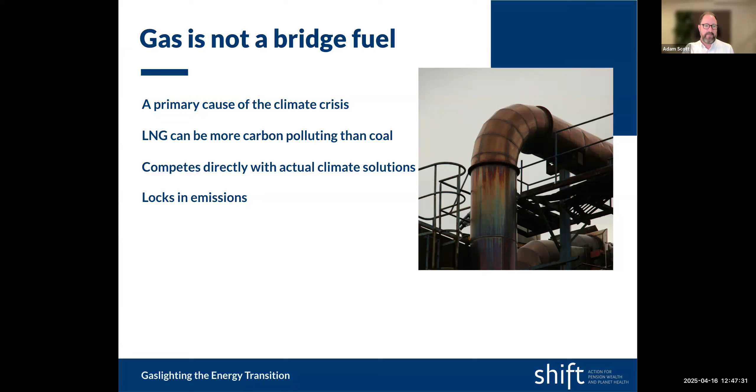But bottom line is we have clean technologies, renewable energies, and heat pumps which can replace gas quite readily now. So we don't need gas as a bridge fuel any longer. I mentioned that the energy transition is well underway, and cheap renewable energy, electricity storage, heat pumps are already taking a big bite out of gas demand globally. So we're already seeing gas facing permanent structural decline any way you slice it.

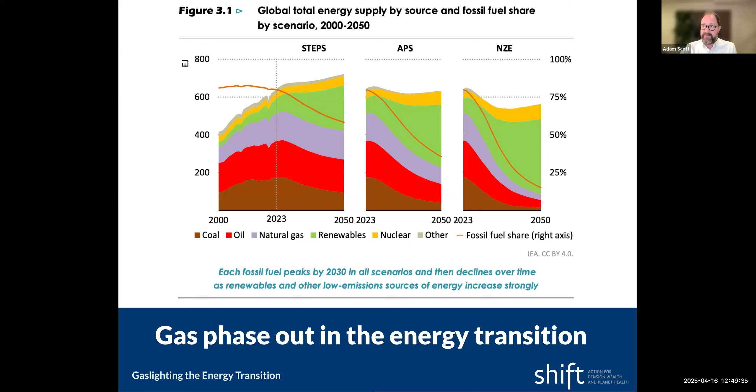And there's just 2 takeaways I wanted you to get from this. Gas is expected to peak and decline in all outlooks before 2030, and it doesn't recover. Renewable energy and electrification outcompete it even without new policies today. And the second thing I want you to take away is that if we have to achieve our climate goals, this NZE on the right shows what gas demand has to do in order to meet net zero by 2050 targets. So anyone who has adopted a net zero objective, including the government of Canada and most pension funds, should be planning for that right side pathway for climate success. In other words, we all need to be planning for the structural collapse of global gas demand, not investing in it.

The utility has to cover the same fixed cost to deliver gas and maintain the system, but now it has to spread that across a smaller number of users. So they have to raise gas consumer delivery prices. And those higher prices drive more people to cut their gas lines and to go electric as well, thus driving even more utility customers to move away from gas until the utility model itself rapidly becomes unsustainable.

And I do want to note, this is a phenomenon we're likely to see with gas utility models all over the world, and it does have very serious implications as well. It creates real equity problems. Not everyone can afford to buy a heat pump, or if you're a renter, you don't have control. So I just want to say there's a whole other side conversation about how to manage this from a policy perspective that's fascinating.

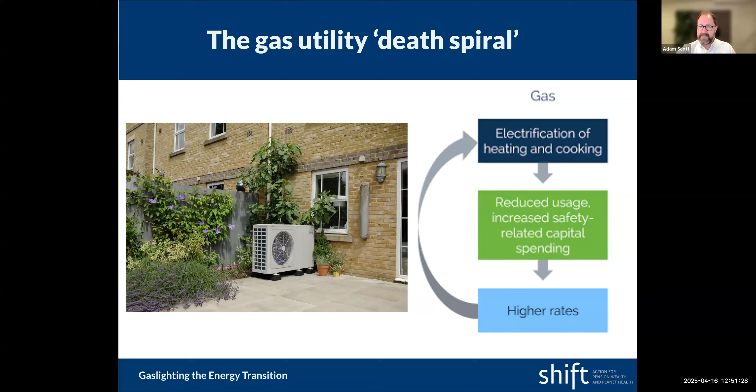And this doesn't include public utilities that are traded on market. So like Enbridge and TC Energy and Fortis, for example, are in addition to this. So we're talking about tens of billions of dollars in direct ownership of these networks. Will pensions be able to sell these assets for anything close to what they paid for them in a few years?

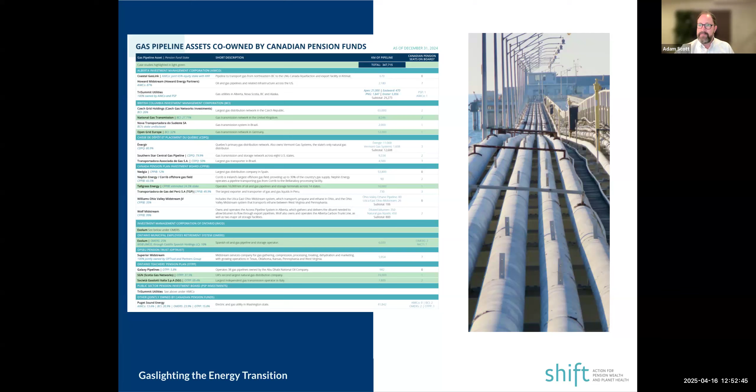Just a quick closer look, which you might be able to actually read. You can see some of the large ownership stakes that we've been tracking. At the top here, National Gas, which is the entire largest part of the UK's gas grid, about a quarter of it is owned by the BC pension manager, BCI. And Tallgrass Energy down here at the bottom is owned by Canada Pension Plan. So almost all of us are 1/4 owners of that gas utility. So this is tens of billions of dollars in stranded assets, potentially.

And so the climate damage and the financial risks of gas are clear, but surely these big financial institutions ask hard questions about this. They must have some due diligence in place. And this is where we see a considerable amount of hydrogen hype, both from the companies, but also from the pension funds themselves. Nearly every one of those companies on that list tells a story about their own plan to use hydrogen to replace gas within their pipeline networks to keep their infrastructure viable and to avoid the death spiral.

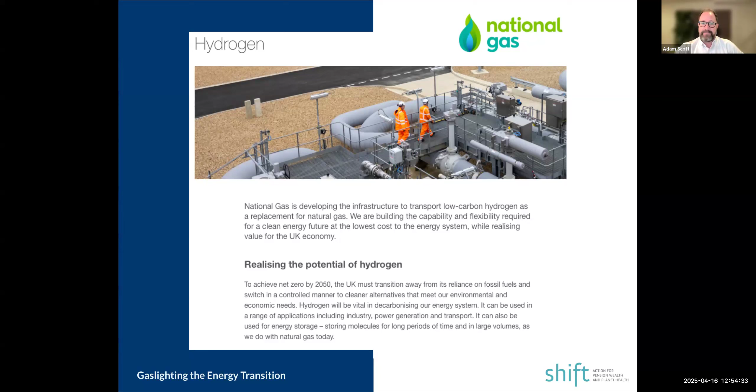And the results on hydrogen heating as an idea are really back now. And I'll give this over to Paul to explain more in the details, but at a high level, hydrogen is just not a good solution for decarbonizing building heat in this way. There's a lot of physical constraints, there are efficiency losses, there are far higher costs for the overall system, higher carbon emissions, potentially safety concerns. There's a lot of reasons why that's not a practical or feasible thing to do. And you would have to really rebuild large parts of the gas infrastructure network if you hope to make it happen in the first place.

And the supply of hydrogen itself is also a huge challenge, which I'm sure Paul can speak about as well, which opens a whole can of worms about issues like carbon capture and storage and other pieces. The electricity grid is already in place and it works well, and solutions like heat pumps are already being deployed directly. And so the need to do that kind of scale of transition doesn't make sense.

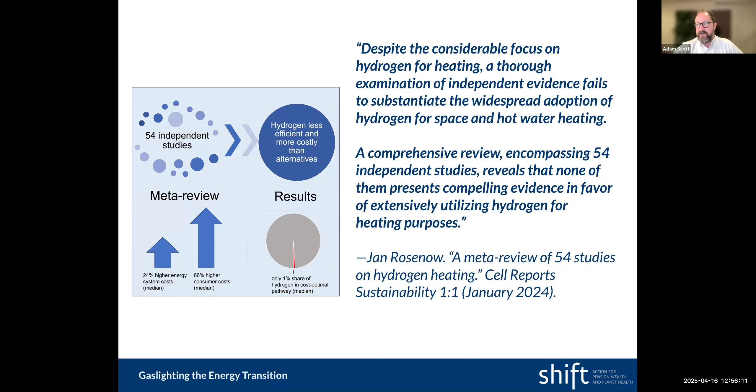And the harsh reality of this whole model is setting in the UK in particular. All of the UK's pilot projects for installing hydrogen boilers for heating homes and making hot water have failed so far. And the UK government, under the previous Conservative government, well before the last UK election, actually commissioned an update to their national infrastructure assessment, asking the question, is hydrogen for home heating feasible? And they came back with a definitive no in 2023. And the UK government has promised to update their whole strategy on this by 2026, where they will very likely cancel or recommend against hydrogen for home heating in the UK.

And you can imagine those sorts of large-scale policy changes could really impact the value of these assets. And this is just a microcosm within the UK, but this sort of conversation is happening in countries around the world where pensions are invested as well, and it's happening in Canada.

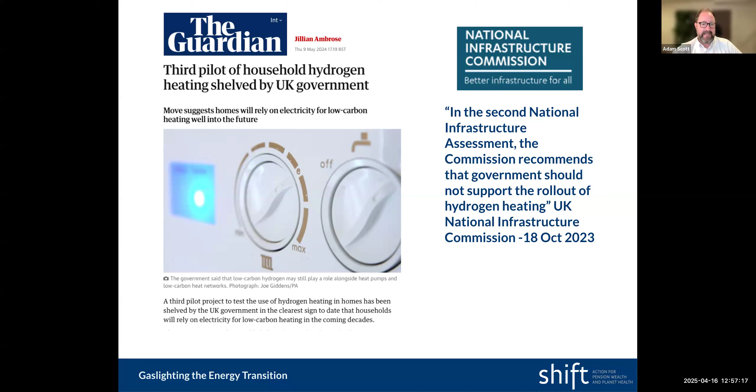There are a lot of complicated pieces to get into for why hydrogen can't save gas utilities from the death spiral. This is a helpful image from the clean energy analyst Michael Liebreich, who was founder of Bloomberg New Energy Finance. And he's developed this graphic over time. This is version 5, and I'm sure it'll keep getting updated to help decision makers understand where hydrogen in the energy transition might make sense and where it's unlikely to be viable.

And I'm sure maybe, Paul, you have thoughts on this as well, but you can see hydrogen has some valuable uses in industrial processes and may play some important but niche roles through decarbonization and the energy transition, but not in areas that could meaningfully reuse existing gas infrastructure at the scale required. And it's really not a viable option for decarbonizing home heating, transportation, or power generation, which really makes up the majority of global gas demand.

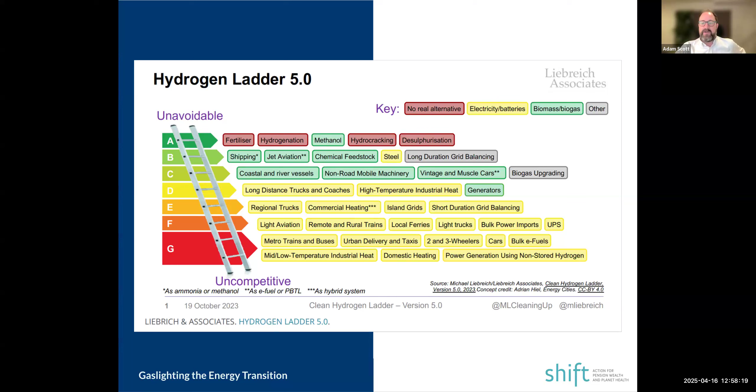Our report sort of ends with some case studies on individual pension investments, which you can look at in more detail. I'll share the link for the report in the chat, but we've also included some recommendations for institutional investors to

avoid the climate impacts of gas infrastructure, but also their own financial exposure to it: to stop investing in new gas and hydrogen infrastructure, to increase their own transparency, disclose your investments fully and explain how they're actually transition aligned, and acknowledge the need to decommission gas utilities over time. This has to be done carefully, and the best way to avoid stranded assets and losses is to start that process now, or at least thinking about it.

And ultimately, to divest and screen from companies that refuse to align with science-based decarbonization pathways, which most of these gas utilities, at least pure play gas utilities, are not at the moment. Yeah, and so I think I'll leave it there, but there's quite a bit more in the report in terms of detail, but I think the important lesson is that

these utility models are already facing very substantial risks, but the investment industry hasn't signaled that it really understands the scale of it. And so this is an effort to shake up the sector to pay attention more closely to the details of the energy transition itself. If you understand the more technical aspects of the transition, you'll be able to avoid these risks in the future, and that's just better due diligence when it comes down to it.

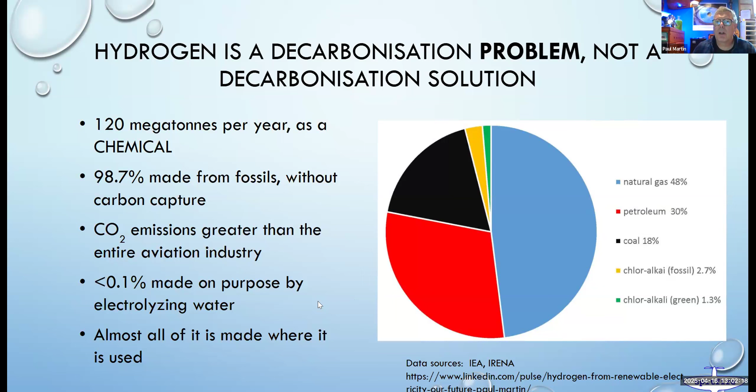Almost none of it is made by the on-purpose electrolysis of water using renewable or nuclear electricity, and almost all of it is made where it's used. Almost no hydrogen moves from place to place. There are exceptions, but the distances tend to be short and the quantity small, and that's for reasons. It's used as a chemical, as I mentioned.

The largest uses are making ammonia, which is the base of the entire nitrogen chemicals industry on Earth, and also the base of the agricultural food chain, feeding about half of the humans and food animals on Earth by crop yield improvements. The other major use is desulfurizing fossils before we burn them. That's obviously going to be a curtailed use in a decarbonized future. And then the final third is a whole bunch of other chemicals uses.

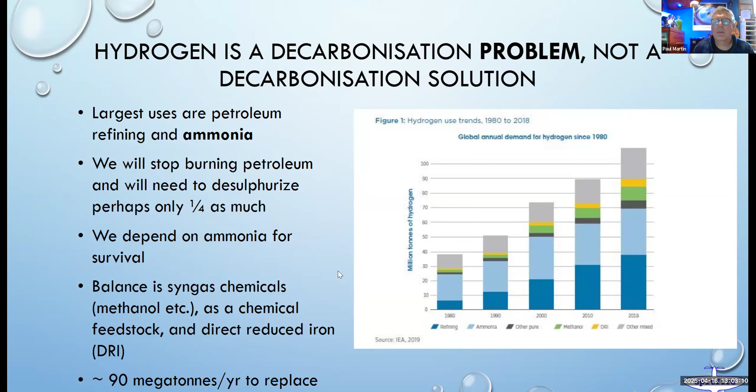So of the 120 million tons or so per year that we make today in the form of pure hydrogen and syngas, about 90 of that will need to be replaced with renewable or low emitting sources of hydrogen in a decarbonized future. And then on top of it, we'll have to make whatever extra hydrogen we want to use for new uses. This is a graphic of the 5 principles of the Hydrogen Science Coalition.

And these are just 5 things that we all agree on. We're a diverse group of people with diverse backgrounds and interests and areas of specialization, but we all agree that really the only hydrogen that you can consider low GHG in realistic terms is green hydrogen, hydrogen made by electrolysis of water using renewable energy. We shouldn't allow hydrogen to delay electrification. So basically that writes off hydrogen as a fuel.

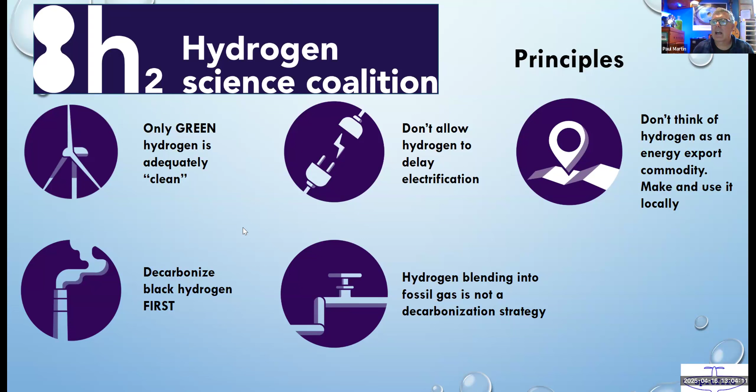Don't think of hydrogen as an energy export commodity because it's structurally unsuited to that task. We need to decarbonize the black hydrogen in the world, this 90 million tons that we need for use as a chemical. We have to do that first before thinking about new uses. And you really just give up on the notion of blending hydrogen into the natural gas network or using it as a natural gas replacement. And that'll be the subject of my focus today.

If you want the peer-reviewed version of it, you can find the paper that I co-authored with several of my colleagues at HSC and also with Ilissa Ocko and others at Environmental Defense. And you can find that in Energy Science and Engineering. And don't worry about the picture. It's just a picture for a nice graphic that Ilissa cooked up for the paper. You can find it in the paper. The paper's free access, so it's not behind a paywall.

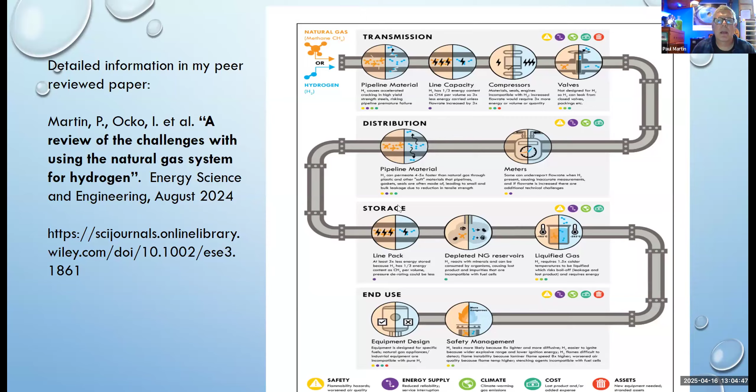So hydrogen as a fossil gas replacement. You'll notice I'm using the word fossil gas as opposed to natural gas because natural gas is intended to distinguish it from synthetic gas, meaning gas made generally by pyrolysis or gasification of other materials. What people call natural gas is largely a fossil material that's pulled out of the earth, and it contains primordial carbon that ends up in the atmosphere as CO2, raising the concentration of CO2 in the atmosphere.

The notion that you can replace this fossil gas and the energy that we use from it with hydrogen is a popular but simple-minded concept. It's kind of a zombie meme idea. Its appeal is simple-minded, and it's so appealing that you'll never kill it. But it can't ever be alive for economic and technical reasons. This notion of gas substitution is largely based on a sunk cost fallacy, which is we have the pipes and they're not going to be useful later, so let's use them for something productive.

And in another sense, it's kind of the let them eat cake of the energy transition. So we can't burn fossils as fuels anymore. Well, what else can we burn? Well, we can burn hydrogen, and that way if we burn it in pure oxygen, we only get water, no CO2. So voila, problem solved. Well, only a few things wrong with that. We burn it in air and make NOx, and we can't afford it. So it really is the let them eat cake of the energy transition.

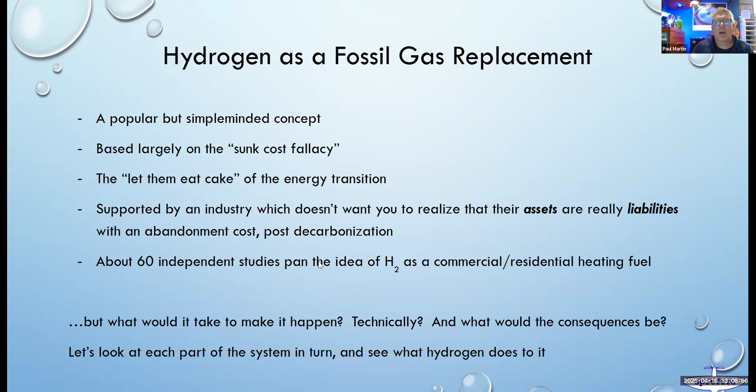The notion is supported by the gas industry, which doesn't want you to realize that their assets are really liabilities with an abandonment cost in a decarbonized context. And as mentioned, there are about 60 independent studies that agree that hydrogen is just not a practical alternative to fossil gas as an energy distribution medium. But what would it take if we were to want to do that for some reason? And I'll deal with that, kind of zipping through here in the interest of time.

But the first problem that you have is that it's pitched as if it's a continuous transition potential, that you can blend a little hydrogen and then a little more later, and eventually you can have pure hydrogen going through the pipes. The problem is that hydrogen's energy density per unit volume is a third that of methane. So it's really like adding water to gasoline. It might be good business if your customers are dumb and they pay for their fuel per unit volume. But it's like adding a diluent to your fuel stream, and that means you have to push more volume in order to push the same amount of energy.

The other problem is that although 20% by volume sounds like a lot, that's the limit at which you start encountering real problems that we'll detail in future slides here. But that's only 7% in terms of energy content. So the maximum decarbonization potential of blending is next to nil. So if gas is a bridge to nowhere, hydrogen blending is the stepping stones to the bridge to nowhere, if you will.

The other real problem is that even at a dreamland future cost of decarbonized hydrogen of $3 a kilogram, relative to about $1.50 a kilogram, which is what the black stuff costs at a zero cost of CO2 emissions to the atmosphere, a zero carbon tax basis. So even at a cost of $3 a kilogram, which is a dreamland future cost of hydrogen, that's still costing you $350 per ton of CO2 emissions averted.

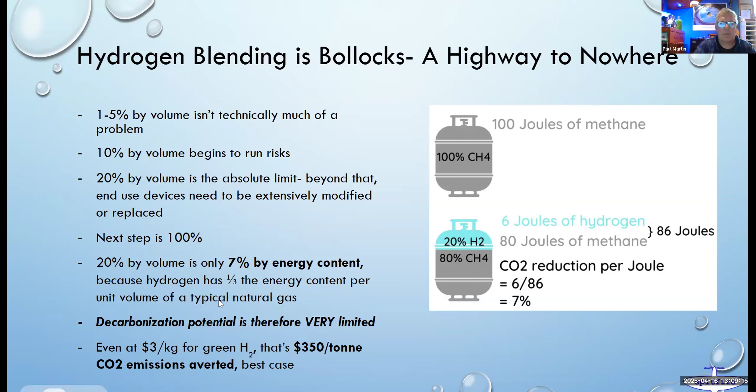So you can imagine that if it's $6 per kilogram, and it might be 9 at the moment or higher, depending on where in the world you're talking about making it, you're talking about north of 700 to maybe even over $1,000 per ton of CO2 emissions averted. And at those sorts of costs, all sorts of things start to make sense. I mean, much less the sane, sensible decarbonization strategies of electrifying transport and electrifying comfort heating by means of heat pumps. Those cost a tiny fraction of this, and yet, that's a dreamland future cost for hydrogen.

The energetics are also really puzzling to anybody that studied thermodynamics. This is a nice graphic that Dr. David Cebon, who's one of my colleagues at HSC, put together, and it shows the comparative amount of wind energy that you would need to supply in order to provide 70 gigawatts of domestic heating in the UK. And if you do it by means of a hydrogen pathway, you're talking about 370 gigawatts of wind energy on the input side versus about 67 if you're feeding heat pumps.

And the benefit of the heat pump, obviously, is that you're using the electricity for what it's good for. You're using it as thermodynamic work to run a pump that pumps heat, and that compensates for a lot of the extra costs and complexity. Whereas with hydrogen, you're doing the exact opposite. You're converting energy in the perfect form, electricity, which is readily convertible to any kind of energy that you want, heat or light or thermodynamic work or whatever you want. You're grinding up its exergy and you're turning it into heat in the form of a stored fuel, hydrogen, and then you're feeding it to combustion apparatus. And what you're left with is precious little energy.

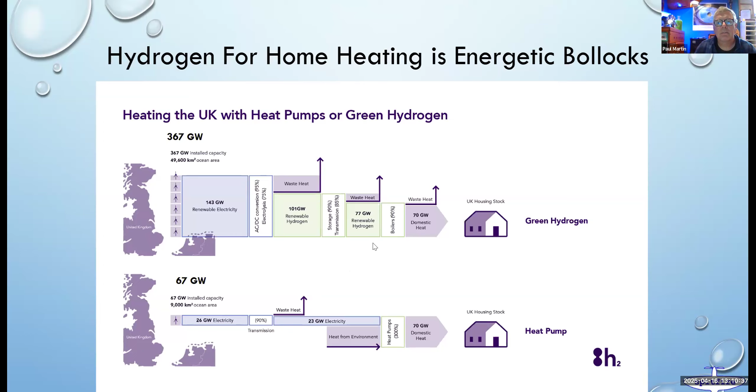Now let's talk about the gas infrastructure. Well, gas infrastructure consists of a whole bunch of pieces. We're going to start closest to the well and go all the way to the consumer. So first of all, the gas gathering and gas plants, the stuff that basically connects the gas wells to the gas transmission network, that equipment is 100% scrap. It has salvage value as scrap, but that's it.

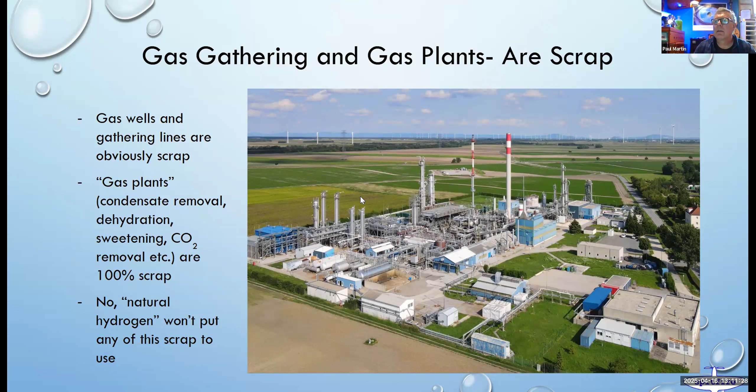And no, these people dreaming of finding large deposits of natural hydrogen in the subsurface, that's a totally different type of gas play. It needs different types of wells. The equipment in the gas plants is not suitable for that. So even if that turns into something, which my colleague Arnout Everts at HSC will argue with you is probably not going to happen, the gas infrastructure upstream is scrap.

The same with LNG facilities. LNG facilities are not convertible to pure hydrogen, and they're not convertible to ammonia either. This is a nonsense idea that has been pitched by people, even including Justin Trudeau at the G7 a few years ago. When I heard it, I spat coffee all over my computer screen. I just couldn't believe that this nonsense was being spoken aloud.

The gases and their liquids have such utterly different physical and chemical properties and temperatures and pressures that there's just no possible way that you're going to use LNG infrastructure to store and distribute and deliver hydrogen across transoceanic distances. And trying to use it for ammonia is just wrong-headed.

If you look at an ammonia plant, it already has liquefaction as part of the plant infrastructure because it's used as a way to get the product out of the gas mixture from which it's made. So there's no need for a separate liquefaction facility like there is with natural gas. So the most you're going to get out of an LNG facility in a decarbonized future is a port facility. You'll even have to demolish the tanks because the tanks are of the wrong construction.

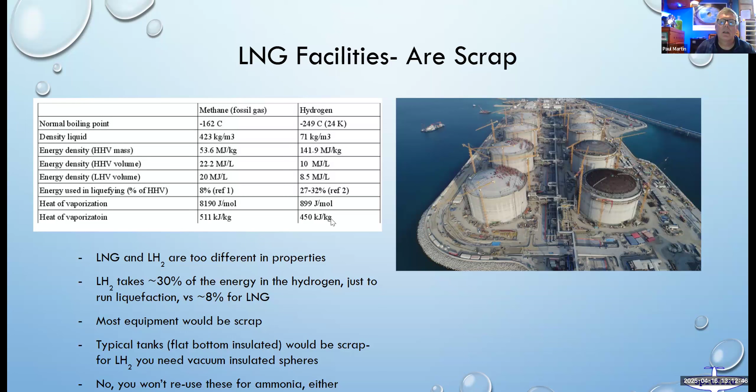The big problem, though, with this gas substitution fantasy is the gas transmission system. This is a really technical topic, but I'll just make it nice and simple for you. You'll hear people talking about hydrogen embrittlement. That's a broad class of different phenomena that happen as a result of interactions between hydrogen and metallic materials. But the real problem in the gas transmission infrastructure isn't hydrogen embrittlement per se. It's a very specific phenomenon called hydrogen-accelerated fatigue cracking, or HAFC.

When you use the hard, high-strength, high-yield strength, brittle pipes that they use to make natural gas high-pressure pipelines, the ones that carry gases long distances across countries, if you add hydrogen to those pipes, what you'll find is that the cracking rate in these materials increases by as much as a factor of 30, and the fracture toughness of the material drops by as much as 50%.

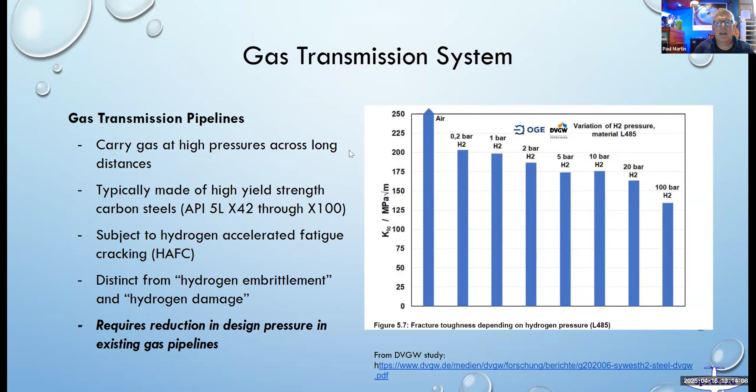And this happens with hydrogen blends, but it definitely happens with pure hydrogen. It's related to hydrogen partial pressure, but it's more complicated than that. There's a really excellent study by an organization called DVGW, which did excellent testing of materials and has demonstrated this to anyone's satisfaction that HAFC is a real thing and a real problem for gas infrastructure reuse with hydrogen.

There are no approved coatings that can prevent this. So it's not a matter of putting a coating or a liner inside a pipe and eliminating this problem. There are people working on those sorts of solutions, but hydrogen is so diffusive, being such a small molecule, that based on my direct experience with hydrogen diffusing right through intact stainless steel in service, I don't think anyone's going to come up with a coating that eliminates this problem.

New pipelines, however, if you want to build a new pipeline and use it for hydrogen, we know how to do that. That's not a problem. So we're really talking about reusing existing natural gas pipelines for gases that they were never designed to distribute.

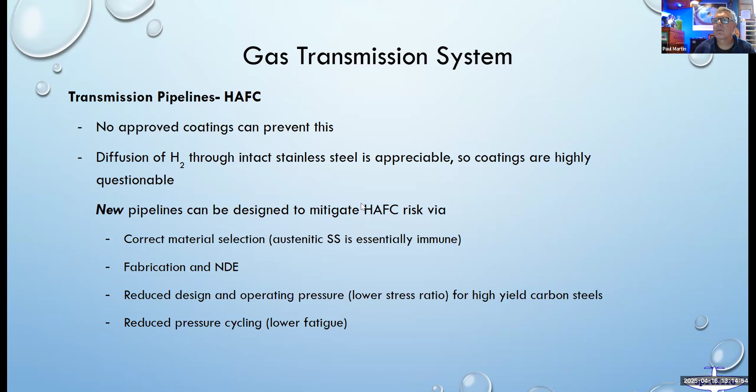The real problem is that even though there are rules that will allow you to compensate for this accelerated cracking and other issues, and to reuse a gas pipeline that was never intended for hydrogen for use with hydrogen, you have to drop the design pressure in order to make it adequately safe, in order to reduce the risk of fracture. And when you reduce design pressure, you reduce the economic delivery rate of energy. And this is an inescapable thing that arises from just dropping the pressure.

But add to it the fact that hydrogen has this lower volumetric energy density, and you end up in real trouble. So you could try to run the compressors harder. You'd have to replace the compressors with new compressors in any case, but you could try to shove more gas through the pipe at a velocity that's not economic, but as it sounds, it will be uneconomic. You won't be able to afford to do it.

And in reality, you're going to have to either accept a dramatically reduced energy delivery capacity in those transmission lines, or you're going to have to twin them with new pipe in order to carry the pure hydrogen in a separate new pipe anyway. And the end result is basically very limited reuse potential for the existing gas asset.

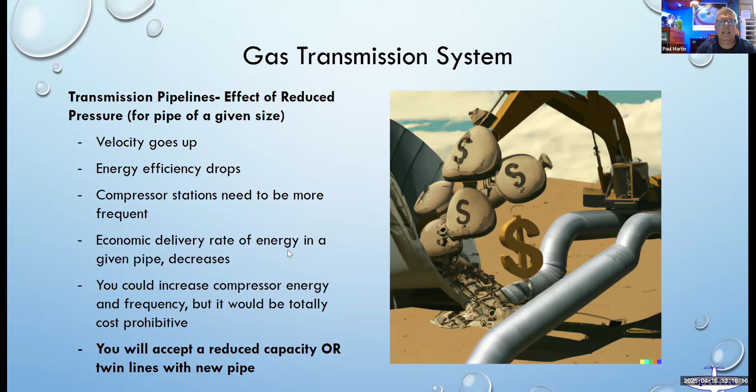Another thing that happens is that we use the stored energy in the pressure of the natural gas. So we pressurize the natural gas above the minimum pressure that we need to use it at. And then we allow that pressure to drop during the day when we have high peaks of demand, and then we pressurize it back up again at night. And this storage is called line pack.

And because the energy density of hydrogen per unit volume is greatly smaller than that of methane, the line pack drops to 1/3 of what it was, even if the pressure doesn't drop. So whereas you might have had 4 hours of storage, now you have a little over an hour of storage. And that storage is incredibly important to the reliability of the gas network.

If a gas network ever encounters a low pressure trip, restarting can take weeks. It's not a matter of flicking a breaker back on again. There are devices that have pilot lights that need to be relit. And if they're not relit, the device will be unsafe and it'll leak hydrogen, for instance, into a home or a business. So this is a big deal.

And the same thing is true. We use natural gas reservoirs as storage for fossil gas right now. We build up the storage in the summer for use in the winter. And you can't do that with hydrogen because it won't be pure hydrogen when it comes back, and there'll be a lot less of it than what you fed. It's possible to build new salt dome gas storage units that are constructed for the purpose of storing hydrogen, but you'd have to construct those. You can't use the old ones.

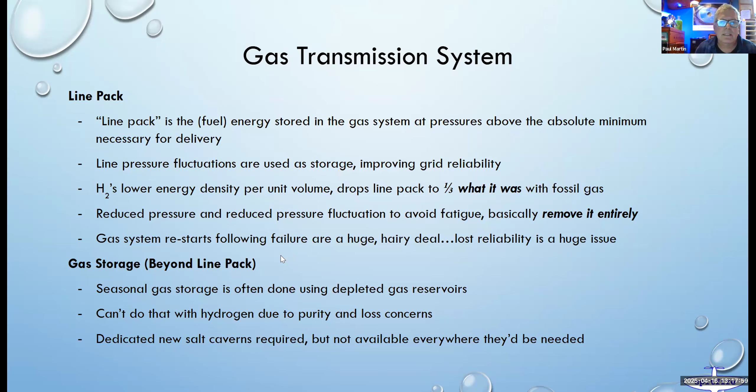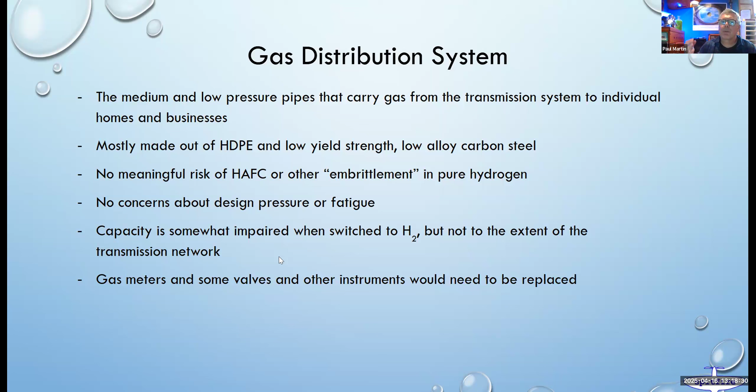The gas distribution system is really not a huge problem. The gas distribution infrastructure that carries gas to individual homes and businesses, that's all mild steel or HDPE pipe. It'll leak, that'll be troublesome, but the real problems of HAFC and other embrittlement phenomena are not a problem there. The real trouble is what use is the gas distribution infrastructure if there's no gas transmission infrastructure to feed it. So the problem with hydrogen isn't in the distribution side, it's in the transmission side.

The other real problem with hydrogen is in leakage and fire risk. And hydrogen has a lot of really unpleasant properties that we know how to handle in industry, in industrial settings, but in a commercial or consumer context, they're very troubling. And if we get time at the end, I'll show this video, but I won't do it now. It's just showing the differences in flame propagation rate among various gases, with hydrogen being extremely fast.

Hydrogen's got a lower ignition energy. It's got a much wider explosive range. So if you have a mixture of hydrogen and air, it's almost certain that you will have a mixture that will be ignitable. The flame velocity means that you get higher overpressures, which lead to more damage. And yeah, anyway, there's a long list I could bore you with, but it's a much more dangerous gas. We know how to handle it industrially safely, but we make a lot of compromises and expend a lot of money to do so. It is much more dangerous than natural gas.

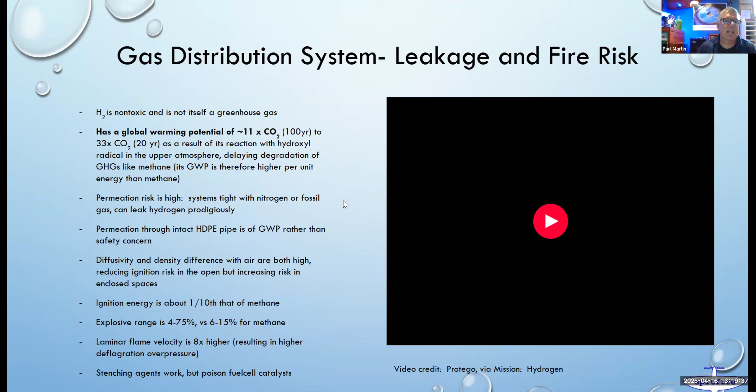This has been proven in quantitative risk assessments that were done for some of these hydrogen utilization trials in the UK. They concluded that they needed to add excess flow devices in order to reduce the size of explosions that happen, because they couldn't reduce the number of explosions. The number of explosions would increase by a factor of 4, switching the gases. So in order to make the risk, which is the probability times the severity, low enough, they had to reduce the severity by adding these excess flow devices.

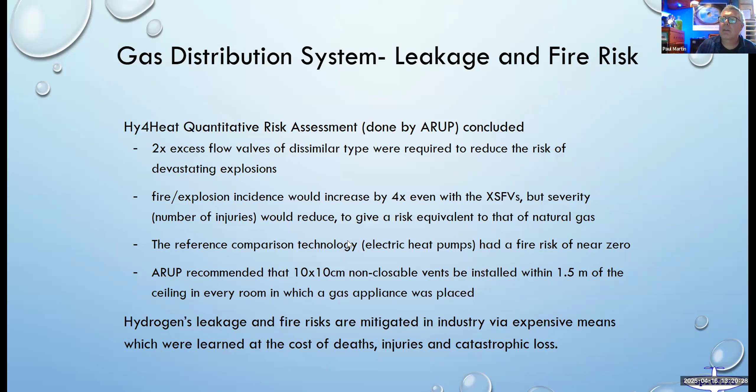Now, if you added the excess flow devices to the natural gas system, that would reduce the natural gas hazard as well. And so that's kind of a dumb comparison. And of course, the explosion risk with heat pumps is 0. So that's the reference technology.

End-use devices with hydrogen beyond about 20% need total replacement. That means engines, turbines, gas burners. It's not a matter of changing a jet inside a gas burner. It's a totally different type of gas. You need a different burner management system, different flame detection systems, and the hazards are not small here. So end-use devices would have to be totally replaced. This is not a matter of simple modification.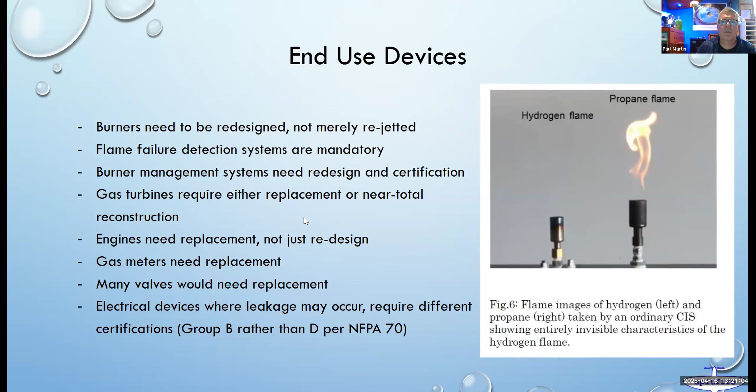From a toxicological perspective, when you get rid of natural gas, you get rid of carbon monoxide. So if you had pure hydrogen, you wouldn't have any carbon monoxide risk anymore. That would be great. The problem is that when you burn anything in air, you heat up nitrogen and oxygen. They react with one another to make NOx. This happens with hydrogen just as it does when you burn anything else, wood, gasoline, natural gas, it doesn't matter. So NOx in the home is already a major contributing cause of childhood asthma. And the reference technology, again, heat pumps, has no risk. So what are we doing here?

So in the interest of time, I've had to rush through things, and I refer you to my other publications, and I'm happy to answer questions. But just to sum up with some conclusions here, low greenhouse gas emission hydrogen won't be a significant gas replacement due to its cost, which is structurally high. It's not going to get cheaper with innovation to the point where it will be cheap enough to waste as a fuel, and its low global warming potential reduction potential.

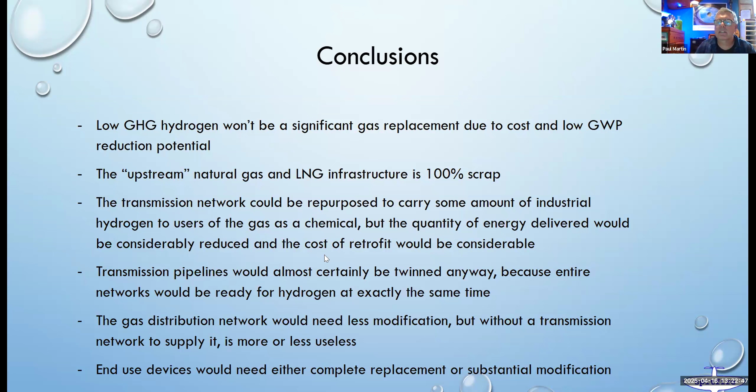The upstream natural gas and LNG infrastructure are toast. The transmission network is under capacity and might be reusable to some extent, but not relevant to energy, only to chemicals use. The transmission pipelines would have to be twinned anyway, because not all distribution networks will be ready with all the devices converted to pure hydrogen service at the same time. The gas distribution network itself is really not a huge issue, but without a transmission network to feed it, it's useless anyway. And the end use devices would have to be either totally replaced or substantially modified to run with pure hydrogen. So what's really going on here?

The renewable electricity generators are in trouble because we don't want to build grids to allow them to carry their product to customers who want it. And as a consequence, they're reaching around for anything and trying to find something that they can convert electricity into to make money that they can ship.

And they're reaching around for hydrogen and hydrogen-derived molecules out of desperation. The gas industry wants to pretend that they have a business post decarbonization, and biogas methane will never cut it. I mean, we'll never be able to make anywhere nearly enough biogas methane to match anything close to the amount of energy they're delivering now. So it's hydrogen or nothing. Sell hydrogen door to door or nothing.

Hydrogen represents a predatory delay strategy and a distraction from real decarbonization of the energy system. That is fundamentally what's going on here. Only a small amount of energy in the form of hydrogen can be moved in the existing gas network, and at considerable public cost. The investment by pension funds in this has been made on the wrong thesis, in my opinion.

And the real problems of hydrogen transmission and distribution drive even dumber ideas, like converting hydrogen into hydrogen-derived molecules, like ammonia, methanol, liquid organic hydrogen carriers, and the like, which, in order to solve the problem of hydrogen's structurally poor properties as a fuel, waste even more energy in order to make it more effective. In other words, to make it easier to move and store.

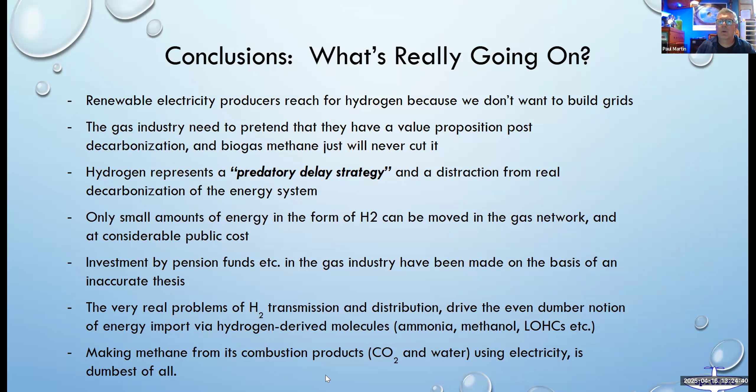And making methane from its combustion products, making hydrogen from water using electricity and reacting that with carbon dioxide to make methane to use as a fuel is just the dumbest of the dumb. It's stupid with stupid sauce.

And with that, I'll leave you with my lovely little meme. It's this simple. If people are talking about making hydrogen where the grid is still dirty, that's not green hydrogen. If they're talking about wasting hydrogen as a fuel, forget it. But green hydrogen to replace black hydrogen, that's really what we should be talking about.

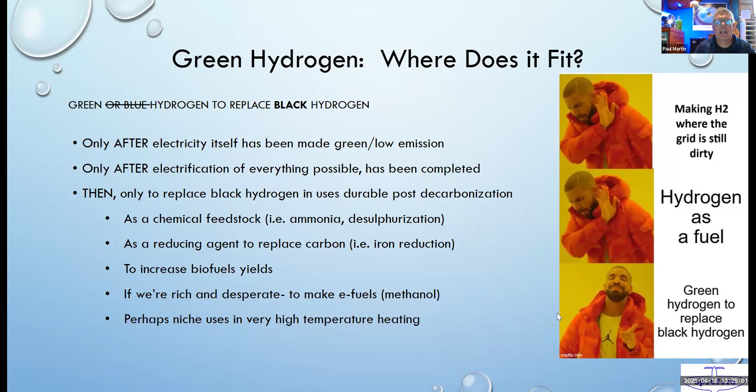Great. Thanks, Paul. This is all very interesting, somewhat sobering for some, perhaps. I'm going to open the floor to questions. We've got some in the chat, but also want to see if anybody wants to use the raise hand function and ask an actual question of our presenters directly. So I'll go with what's in the chat then for now and see if somebody's inspired.

So one that came up immediately from a couple people is this question about e-gas, which there seems to be some interest in Quebec. Yep. And I'm wondering, maybe we explain what this is. Yeah, and explain what it is, and then where does this fit in terms of overcoming the technical limits of putting hydrogen into gas pipelines?

Absolutely. So this e-gas is the notion that I talked about. So the idea is it's hard to move hydrogen in the natural gas network for the reasons that I explained. So what you would do instead is you would take CO2. Now, it would have to be CO2 from a biogenic source, something that has recently been in the atmosphere, such that when you burn the gas at the end, you're returning biogenic CO2 to the atmosphere.